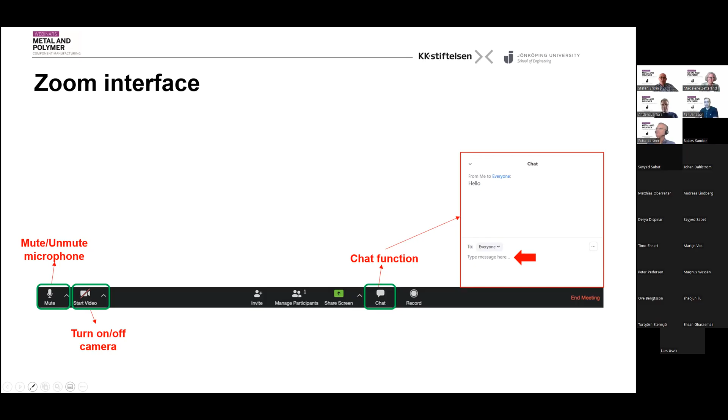Well, the topic of today is on the potential use of rheocast aluminium alloys for vehicle chassis components. And this is based on a project called Rheca, which was funded by Vinnova. Our partners here were Comptech, and then we had Scania and Volvo Car Corporation as part of industrial support companies. It was also a collaboration between Jönköping University and the Royal Institute of Technology in Stockholm as well. So that means it's a rather wide collaboration.

Now, when you start something like this, the world is constantly in flux. And there were some rather large changes in the casting industry in the recent few years. One thing that happens is that when you look at the car body, you have a new type of driveline that comes into large scale. You have a battery area, and then you have the rear and the front of the car. And the big change that has taken place is that casting has been replacing many parts in the rear and in the front here. So there's single piece manufacturing instead of maybe having 70 to 100 pieces that are being joined together. And that means some rather dramatic changes.

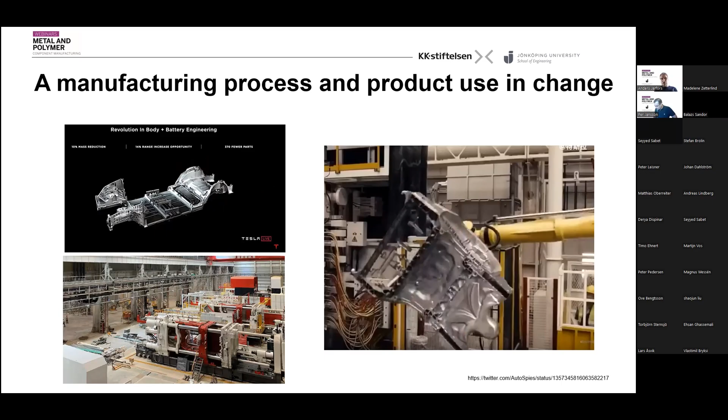And this has changed during the course of the project. And it has taken real speed, and that has also naturally affected both the start and the end of the project. So what are we going to talk about today?

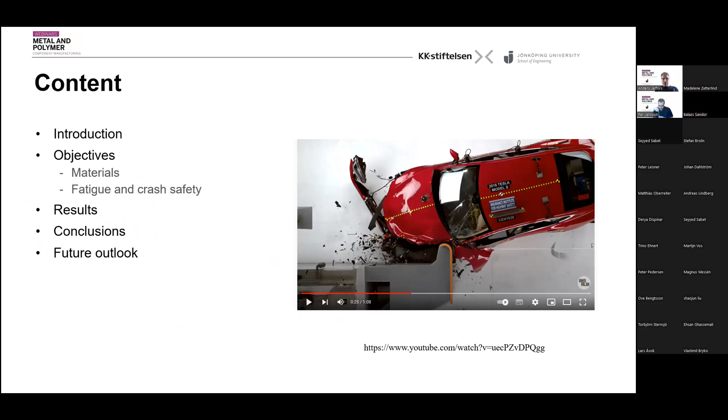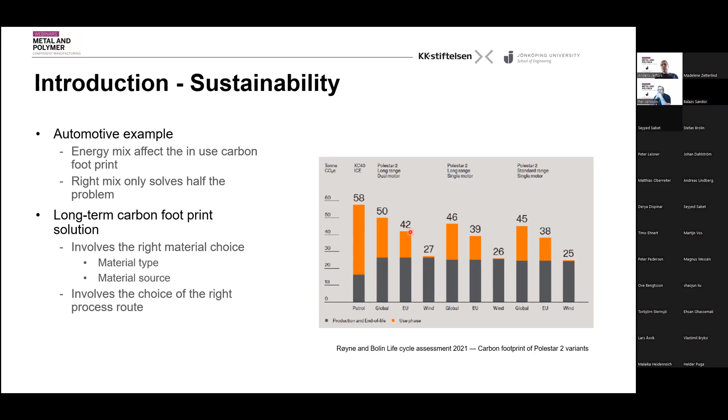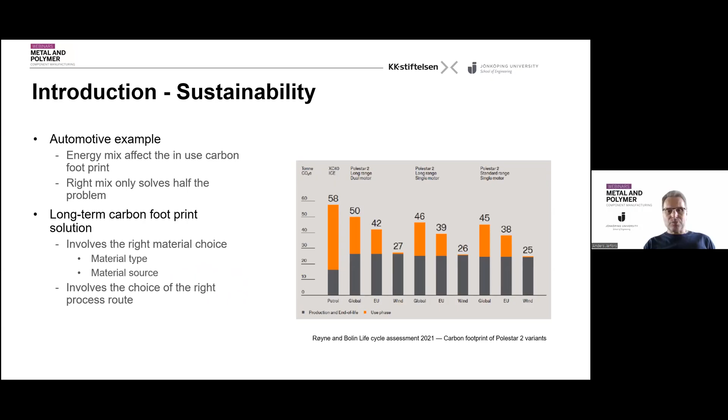So looking at the Paris Climate Accord, going beyond that, it's not enough just to change your energy mix. You also need to take a look at how you do your manufacturing. And a lot of this lies in the use of primary and secondary material. Therefore, there are a lot of questions related to manufacturing that come up when we start talking about sustainability. So for the long-term carbon footprint, it's about the material choice, what material type we should use, and what the source of the raw materials for that material type is. And that also, of course, involves the right choice of process route. So that is one of the foundations.

The main thing that happens here is that we have a change in driveline. That means that the nature of the products being produced will change. Internal combustion engines will no longer be dominant, and that means that the material mix will be different. And then we have circularity. We need to see how the materials can be recycled.

And of course, the driveline is one part, and then you have the body in white. The body in white is something which will be more in focus here today, because we are talking about larger functionally integrated castings and issues related to this. If you look at the material used today, you have a lot of sheet and extrusions, and these generally have lower silicon content. And the interesting part, if you look at the rear of the car, is that you have 100 parts in that. That might constitute, say, 4 or 5 different alloys and many procurement processes and many processes related to joining, and also a lot of tools.

Now, changing to a single casting means that the material mix will change. The number of procurement processes will be reduced, and the material usage will be modified. So there's only one material in the back, and that is actually conducive to circularity because you don't have issues with contamination between different material kinds. You have only one material in the back, not 4 or 5 or 6 or 7 materials, only one. And it's a reduced number of joinings. You don't have contamination from rivets and bolts and things like that coming into the material. It's actually making sustainability easier.

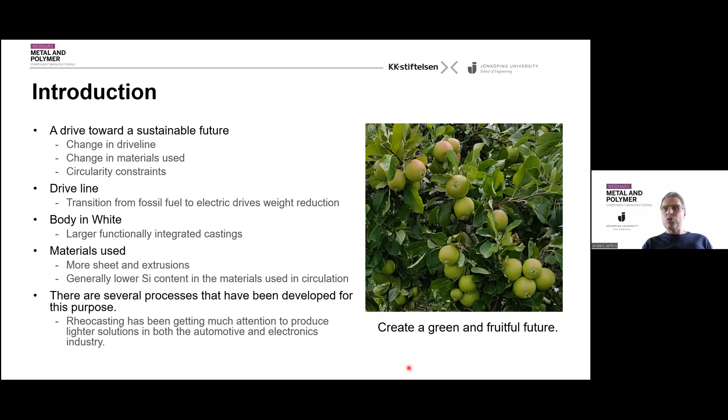Now, Rheocasting as a process, the whole idea is to reduce the heat content in the material before you cast it, and also to provide some particular flow properties. So it should be shear thinning, and it should keep turbulence to a minimum. And there are essentially 3 different routes. We have thixo processing. That means that you reheat and you remelt something. And this is typical thixomolding, which is used in magnesium materials.

And then we have rheoprocessing on the other side, which is a process where you cool down and you allow it to solidify. And a lot of the processes today, like the GISS and the SEED process, a new Rheocasting process, are found here. And what we've been working with, and you will see more about that, is the Rheometal process, which actually has an element that is being reheated and an element which is being just cooled down. So it's a mix of 2 materials. And therefore we call that a little bit of a hybrid process here.

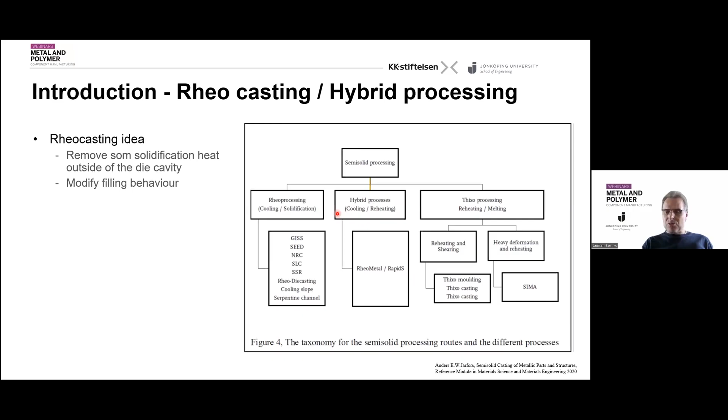All of these processes, as I said, they serve the purpose of reducing the heat input primarily. And when you look at the reduction of heat load, thermal load, the first thing that happens is that die life goes up. So you get better die economy. And then you need to use less release agent. And this is actually something which is very, very important, because what drives defects is actually release agent emissions and atmosphere generated in the tool. And this is very important when you're going to cast larger components. So this is a process issue that we need to work with. And that is something that is critical to what we are working with.

Another benefit of reducing the die spray is that cycle time is being reduced because the spray cycle is going down. And that is also a critical element. What has been seen also is that you have significant scrap reduction at the casting station because you actually have less porosity and less issues with the release agent. And that means that what we can talk about in terms of productivity, since one of the benefits is that you can use lower silicon alloys. That means that we're moving into alloys that normally are seen in gravity die casting or low pressure die casting. And that means that we can offer a productivity which is like high pressure die casting, but with alloys and quality which is similar to gravity die casting processes.

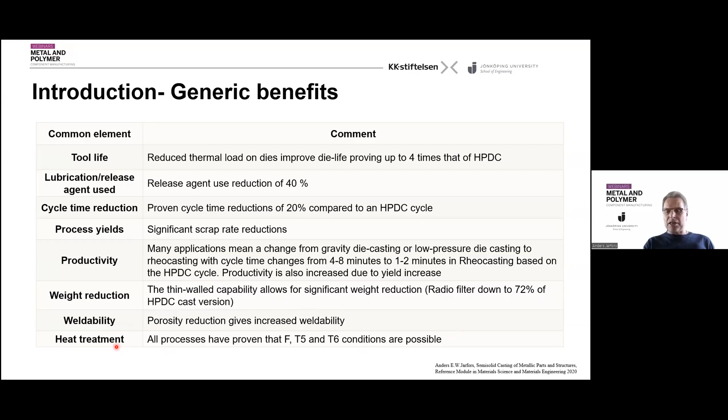And then you have the thin wall capacity, which is also important when it comes to weight reduction. And this is due to the fact that we have a shear thinning behavior in the material. And the shear thinning behavior allows you to better manage transitions from thick to thin sections. And because you have reduction of porosity, primarily because of the reduction of release agent, and that you have a partial solidification, you get weldability and heat treatability as cream on top. So Europe is one of the areas where these processes are growing, but it's foremost growing in Asia and in manufacturing there.

So if you look at the Rheocast components that are now out and being used, it's, for instance, knuckles. This is in production and used in cars. We have shock towers. This is a BMW shock tower, which is being road tested at the moment. And both these are produced by a company called Silver Basis in China. And what you can see is that, first of all, you get good productivity. What you get is that you can actually utilize the better ductility to have a weight reduction. And cab mounts that are in production in China have shown 59 to 68% weight reductions. And then under introduction, you have connecting rods, main bearing caps, knuckles, control arms with weight reductions in the order of 10 to 56%. And bench testing has all been passed by the components that I'm mentioning here, and some of them are in production and some of them are under road testing.

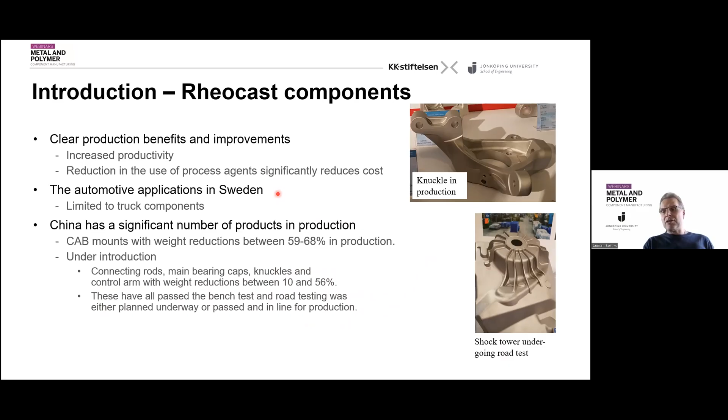In Sweden, we have essentially been successful in producing truck components. That is the main success here in Sweden, and we're working to see if we can get applications in the car industry. And of course, then the mega casting by Tesla has put us on high alert here. So if you look at the Rheometal process that we're working with, then you take the metal, you take off about 7% of the melt, and then you have a cassette where you have 6 of these in cooling, and you stir it into the ladle.

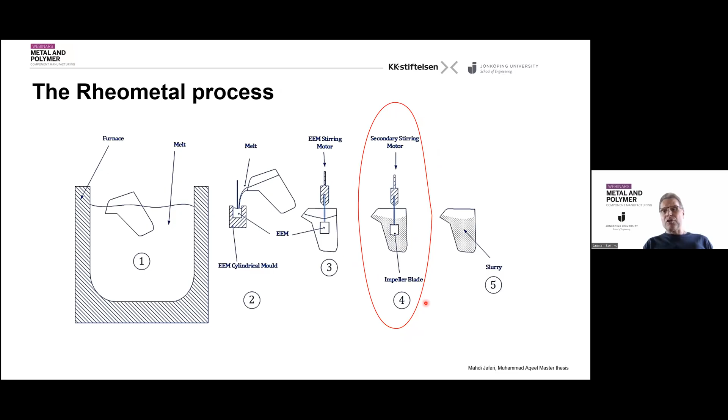So you reintroduce the 7% you just skimmed off, but which has been cast in the previous cycle. And previously we were just pouring that slurry, but we saw that there were some issues in this, and we added on a second step. A lot of the work that we've been doing now is to understand the consequences of this second step. And that is the type of results that I will show you here today. And it has some rather significant consequences.

Now, what we saw when we look at the static material properties is that we have, of course, the high pressure die casting ratio, or standard, so to say, that is 1. And when we have the single stir, we did not always get a property increase. But with a double stir, we had about the same properties. What was different was that we had a change in the ultimate tensile strength. So we had a slight reduction when it comes to single stir, but with the double stir, we had a significant increase in properties.

And of course, as you know, materials harden during deformation, and there must be some changes in elongation as well. Now, as you can see here, with the single stir, we had a slight reduction in yield strength. And that is also a consequence of how the material actually solidifies. If you get something which is softer, you also have something which has a little bit better elongation. But what we managed to do with the additional stir was to recover that strength without loss of elongation. Actually, what we got was an improvement of elongation. So we could expand the elongation by 50% by doing the double stir, at the maximum, so to say.

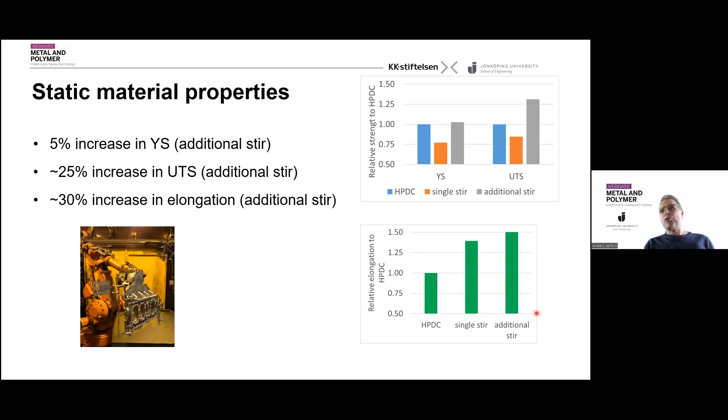Now, one thing that was up for discussion is also porosity. As you know, when you talk about porosity in commercial size materials, you have a relatively large porosity level. And in this case, it was a full-scale large component. With the single stir process, we had up to 6% porosity in the regions that we were investigating. We also looked at the pore numbers, so the number of pores per unit area. When we did the double stir, we actually didn't really change the number of pores, but we significantly reduced the overall porosity. And this is, of course, not surprising, because when you look at the extension here, if you halve the porosity, then of course you get better elongation.

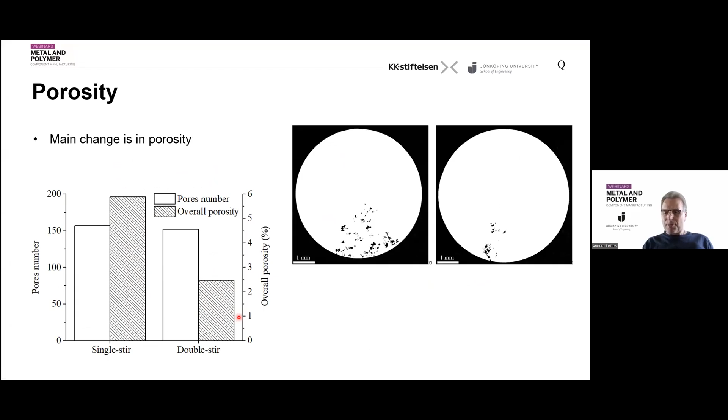Then we also did fatigue testing, and this was push and pull fatigue testing at 150 degrees centigrade, which corresponded to what this type of component we had as a target was supposed to endure. The high pressure die casting managed about 60 megapascals, while we got an increase with the semi-solid processed materials. We used the staircase principle in order to establish the fatigue strength level here. One thing which is important to say is that there is not really any change between the semi-solid material with a single or a double stir. You have a reduction in porosity, so you have half the porosity, but it did not really affect the fatigue performance.

This is something which is still under debate for us, but it's definitely so that the defects here are not pore driven. So there are some other defects that we need to manage here, and this is where our research is continuing. When we looked at the pore size and the pore size distribution, we saw that we had a slightly reduced amount of the larger pores. So all the pores became smaller. But since it did not significantly affect the semi-solid process, the reduced porosity did not significantly affect the fatigue life. There are other elements here that we need to look at.

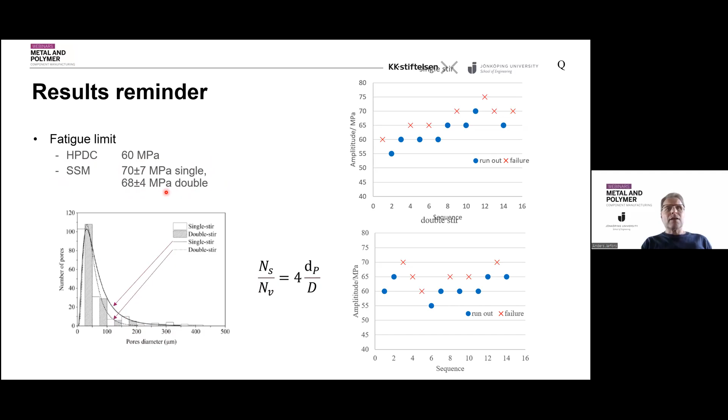When you focus on this, what we can say is that the fatigue strength definitely was 70 megapascals and was comparable between the two processes. What we could see is that defects initiated in similar locations, and there were cracks with crack sizes of about 1100 micrometers. And in the stirring process, since this did not significantly influence the fatigue life, we could say that the double stir process did not influence the number of pores.

So that means that we did not really introduce more defects by stirring a second time. But the issue is still that even though shrinkage was significantly reduced, we did not strongly affect the fatigue life. What we saw here is that oxide content is probably similar for the two processes, but we need to work more on how to actually manage filling and such.

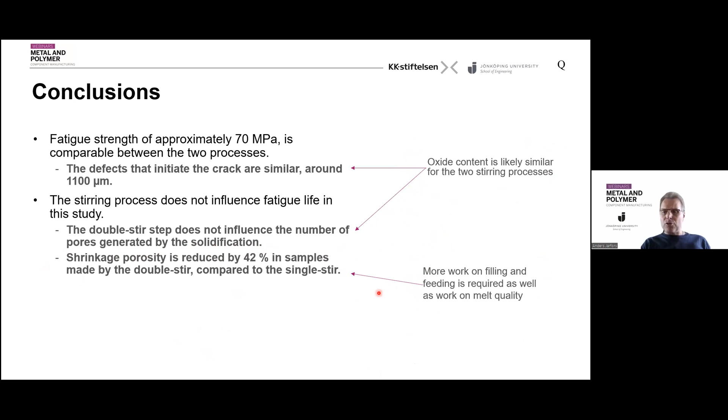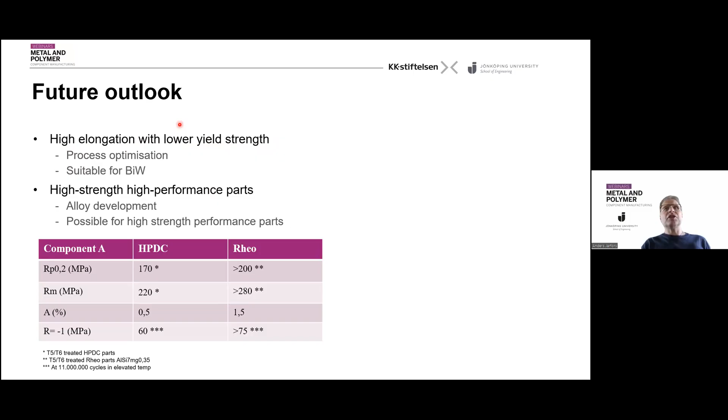And this comes as a rather important part, because if you look towards the future, one thing that we could see is that we could have a better elongation, especially if you have slightly lower yield strength requirements. That means that what you can work here is the low-hanging fruit, and you can go directly for process optimization, and you can start working with body-in-white type of components. When it comes to high strength performance and high performance parts, there is likely to need further alloy development. Since we can have better elongations, we can actually have better crash performance, even if you have a slightly lower strength of the materials.

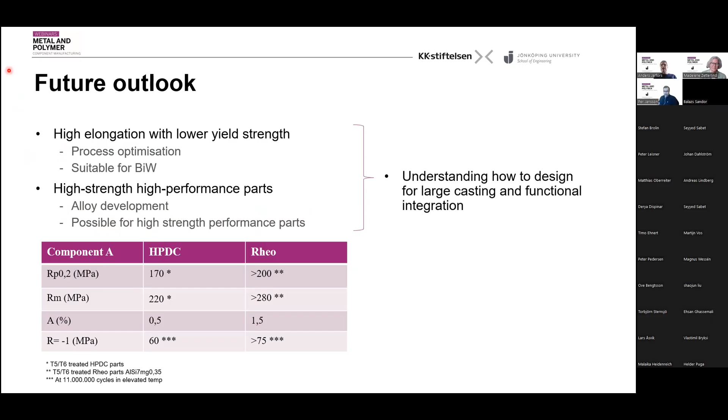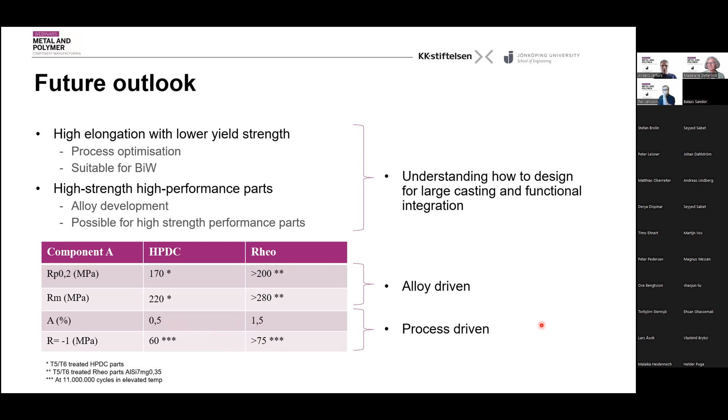Now, the thing which is important to realize here is that the first part is that you need to understand how to design for large casting and functional integration. And the strength of material is primarily alloy driven. So if you want to have a strong material, you need to work on the choice of alloy or alloy selection, while things like the elongation and the fatigue strength are primarily process driven. And with that, I would like to thank you for listening, and we should move on.

So Madeleine. Yeah, thank you very much, Anders, for this nice presentation. We have actually a question in the chat, so I will read it for you, from Johan Dahlström. Sustainability, what is standard deviation for CO2? Oh, the standard deviation, I don't know on that one. Sorry, Johan. But I can share the report with you if you want. Okay. Thank you. Good. So I don't think there are any other questions right now.

Yeah, one more question. What is the difference between the single and double stirring? Oh, well, the single stir is essentially only when you create the slurry and you allow the metal piece to cool down the melt and form the slurry. The second stirring is something that we call melt activation. So that means that we condition the solid particles in the slurry by a second stirring stage. And there is no melting taking place in that step. It's essentially only a mixing and shearing operation where we prepare the melt to have the right shear thinning behavior and the right yield strength, because the slurries that we are talking about have a strength as well. They do not flow automatically. They need to have a certain shear level before they actually start to flow. And this is very, very important when it comes to die filling behavior.

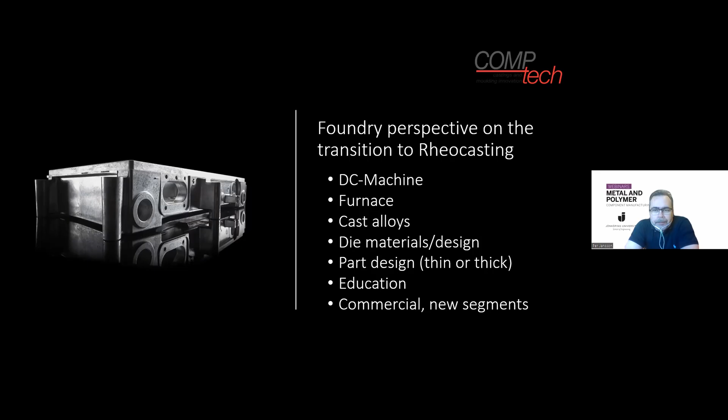So, the die casting machines. First of all, you need to look at the size of the die casting machine. Today, if you have a conventional high pressure die casting machine, you have the projected surface of your shot versus the metal pressure you're going to apply on that surface. That gives you an opening force, and that dimensions what size of die casting machine you are using. What we have learned is that when you do this calculation, you can apply a factor of approximately 0.65 and still be able to cast those parts in that same locking force machine. This is, of course, also somewhat geometry driven, but in general, 0.65 is safe to calculate.

Another thing that this brings to the die casting machine is the shot end, because it has been shown that we can cast much higher shot weights in small machines, and then you have to ensure that you can apply such a large plunger in the machine, so you are able to inject the amount of material needed. So one cannot only look at the locking force, one has to think a little bit on the injection side as well. Then we have the velocity of the metal, or the piston, so to say. If we talk about thin wall castings, we use a higher velocity, similar to the shots you find in a conventional high pressure die casting shot. But in thick wall components, it's very important that the machine can handle very low velocities, which is not common to use in conventional high pressure die casting.

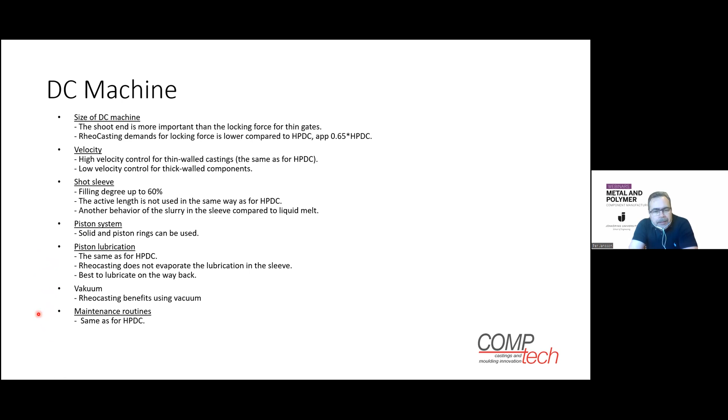Vacuum, that's also something Rheocasting benefits from, in the same way as conventional high pressure die casting. So if you are equipped with that, you can use that. And then if we take the maintenance routines, there's no difference between Rheocasting and high pressure die casting, so to say, regarding the die casting machine.

It also depends a little bit on how you handle your melt. Do you have central melting, or do you melt by the machine and so on? So you have to take that into account. We have seen that with a central melting system, we have less variation in temperatures. Temperature of the liquid part is in general very important. If we have central melting, it's easier to clean and degas the melt. It goes the same way with conventional high pressure die casting.

If you're melting in the furnace by the machine, it's very important that you have enough capacity in the furnace, so you can avoid the temperature fluctuations. And then of course cleaning is more difficult when you melt at the die casting machine in the furnace.

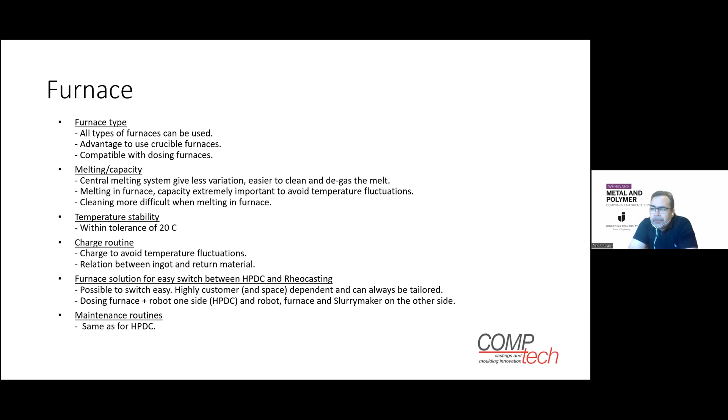The alloys then. This is probably the biggest change if you compare with conventional high-pressure die-cast parts, which usually use eutectic alloys, I would say between 9 and 12% of silicon, right in the middle here. That means that we have a very small process window for making the slurry, because we live on the distance from the liquidus line down to the solidus line. And here we would like to have a long distance, compared to what we get with the high pressure die casting alloys.

What's important when you do Rheocasting is that you make a thermal analysis to establish where you have your liquidus temperature. And then when you set up the process, you set the superheat in relation to the fraction solid that you need, so you get a very stable process. You then need to assess the solid fraction that you get from your settings in order to be able to reproduce this and so on.

So the alloy needs to have in general a lower amount of silicon in order to get a good solidification range. We usually talk about hypoeutectic alloys, because that's the most common, but it's also possible to go to the hypereutectic side as well, but that's not so common.

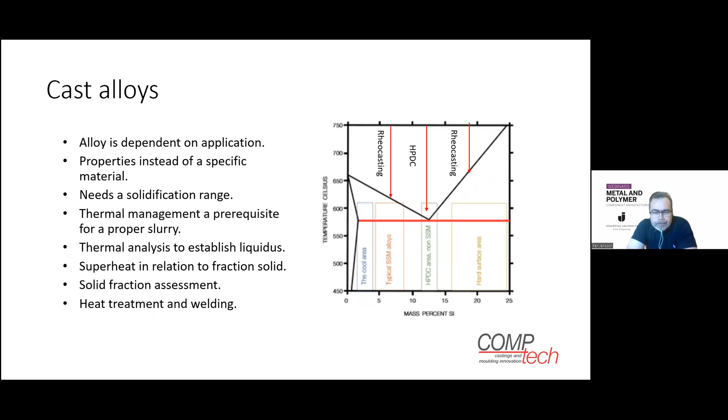The tools, or the dies: we use the same type of steel in the Rheocasting tool as we do in high pressure die casting. We have the same heat treatment of the steel and so on, so there's no difference here. Die tempering, I would say, is perhaps more important from a part geometry and die lubrication perspective than the switch from high pressure die casting to Rheocasting. In general, if we are able to cast at a higher die temperature, it's beneficial for the process, but that's mainly decided by the geometry of the part.

We are using the same spraying and release agents as we do for high pressure die casting. What you choose is component dependent as well. And as I said, a warmer die is preferable for Rheocasting.

The big change in the die is the gatings and the casting systems. We are using larger, thicker gates. We prefer one flow front so we can avoid metal meetings inside the cavity as far as possible. We also need larger overflows and vents, especially thicker ones. It's very common that we need overflows where we have, for instance, a core, behind which the metal meets. We would like to place an overflow there so we can get out the metal that has met, so to say.

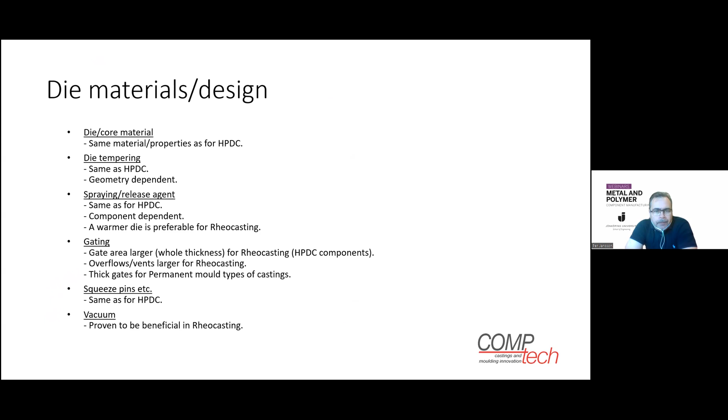Take the next slide. If we look at this, we can come in from two different routes: from high pressure die casting, or let's say from more thin-walled parts, into Rheocasting, and from the permanent mold type of casting, low pressure, thick-walled into Rheocasting. There's a slight difference in how you approach these types of castings.

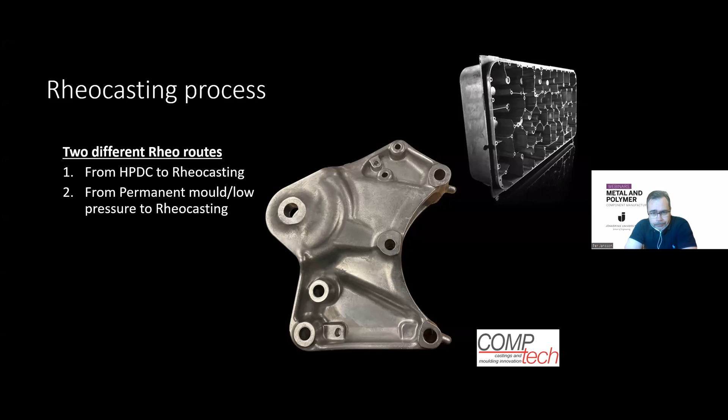If we take thin wall into Rheocasting, it's more similar to conventional high pressure die casting design. Often only very small or minor design changes need to be made. The alloy, however, needs to be changed, and there are alternative alloys that exist. We normally use larger gates and vent areas, which means you might have a change in how you remove the gates. You use perhaps conventional trim pressing, and that might have to be changed into some kind of cutting solution instead.

We have seen that since we solidify a majority of the material outside the cavity, we have less shrinkage force inside the cavity, which means that we can apply smaller drafts if needed compared to high pressure die casting. In these types of castings, I would say that vacuum is always preferable in order to get rid of the entrapped gas.

Placement of venting and overflows needs to be analyzed with simulation due to the different flow behavior compared to high pressure die casting. We have seen that simulation is always needed. We don't have the same experience in Rheocasting as we have in high pressure die casting, and therefore we need to build it up, and the simulation tool is a very good way to do this. Velocities are highly dependent on the geometry and how high we can go. Limits are not yet really established, but velocities are, however, low in general compared to liquid casting. And as I said, simulation is a very good tool, and I would say always needed.

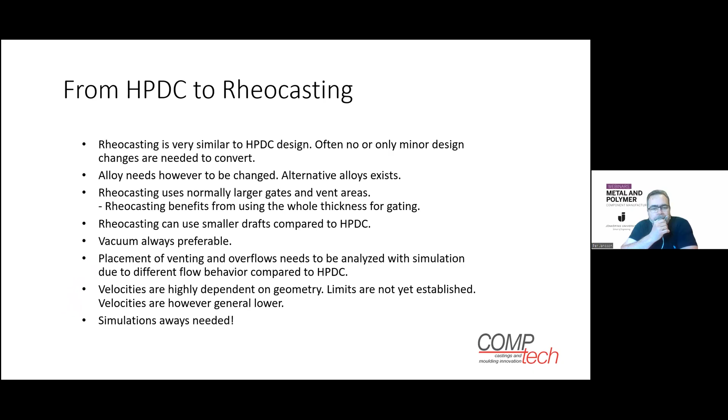And then if we look at the other type of castings, where we come in from the more permanent mold, thick wall castings. The design here is different compared to thin wall, because we only have one source of pressure, which is the plunger, and we need to see that the part can solidify towards the plunger, so we have more pressure roads open inside the casting, if I say. So you need to think a little bit more pressure with Rheocasting compared to perhaps speed, as you normally think in liquid casting. So we need to ensure that we get the right solidification path towards the plunger.

We don't have any external feeders that you have in permanent mold. We can use steel sliders instead of sand cores. We also have some possibilities for sand cores. We are in projects evaluating this at the moment for, I would say, impossible geometries, rather thinking like that. We believe that the gating in Rheocasting is anyhow smaller compared to permanent mold.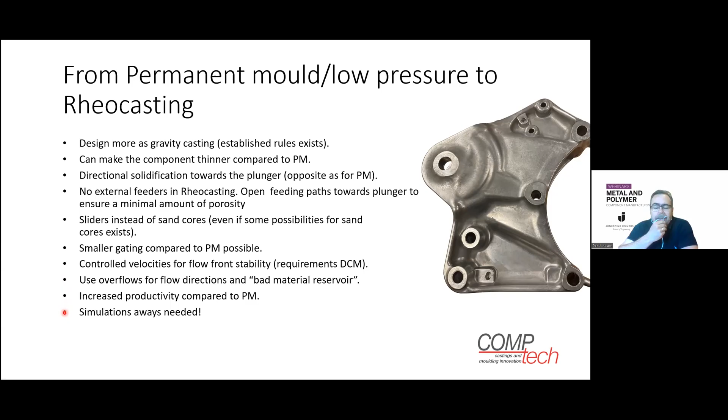Here it's important that we have a controlled velocity for flow front stability, because in these types of castings we see a very laminar filling behavior, totally opposite from high pressure die casting, I would say. Overflows in some way are very important in these types of castings, where we need to make sure that we get out the bad material, let's say, or the first material, flow fronts and things like that. We see here also that we have an increased productivity compared to permanent mold, and basically we are introducing a totally new palette of business possible for high pressure die casting compared to what they can do today. And also here, I would say simulation is always needed.

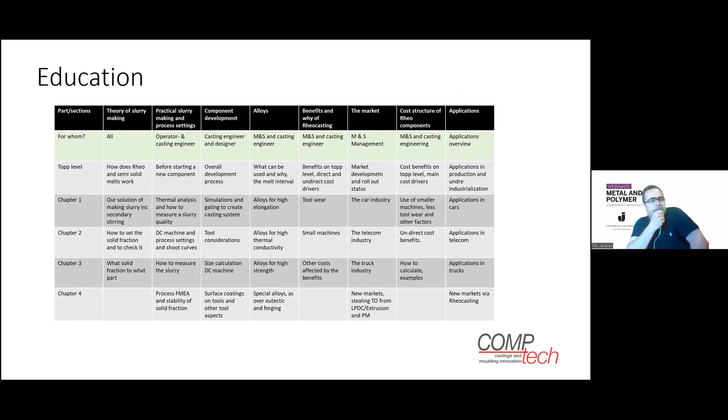And then we have the commercial aspect and the new segments. We see that we bring new market shares for high pressure die casting foundries by introducing Rheocasting with increased productivity. We can use already traditional permanent mold alloys like A356 with Rheocasting, and we can also introduce very low silicon alloys that can be cast with Rheocasting, which introduce new business opportunities. Each die casting machine will also get a larger process window, meaning that each die casting machine is applicable for more part numbers compared to liquid casting.

We see an increased die life with reduced heat checking, erosion and soldering and things like that. We can cast thinner and longer compared with high pressure die casting, with alternative material that also gives improved properties. We see increased thermal conductivity with secondary alloys, which is very interesting for electronic applications that generate heat, and telecom, for instance. We see big benefits with pressure tight and leak-free components, which we can cast without impregnation. And then we have heat treatable and weldable applications, which is difficult with conventional liquid casting. And then we claim that we give a more sustainable end product, because with reduced silicon inside the component, it means a lower CO2 footprint compared to eutectic alloys. And then we can cast closer to the finished shape and give less scrap after machining.

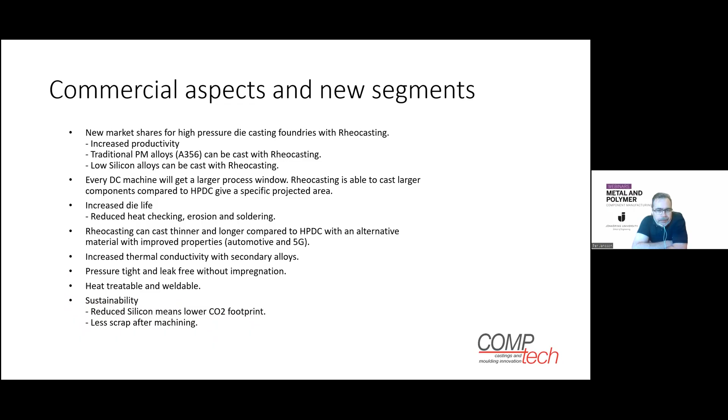So thank you. This is a little bit from the foundry perspective of introducing the Rheocasting technology.